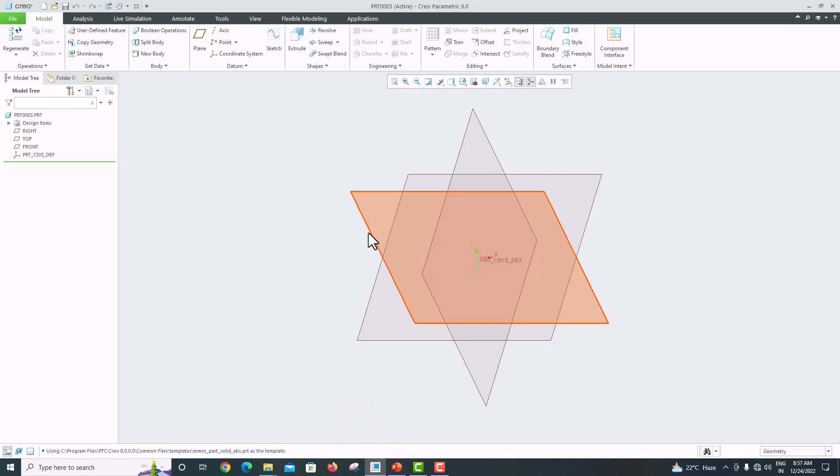Go to software, I am taking the front plane, sketch view. Draw the center line, press the roller to confirm.

Now start the sketch with a small line. Press the roller to confirm. Again press the roller to confirm.

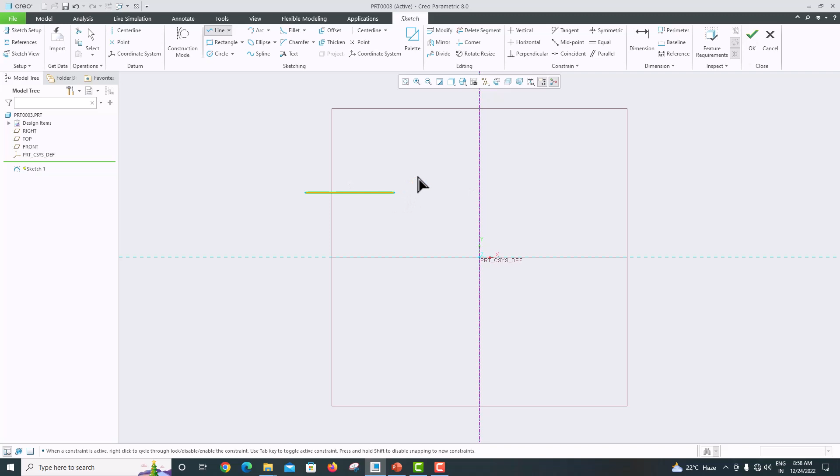Now just specify the length as 45, and this height I am specifying as 12. Press enter, then click fit screen.

And one more dimension we want to specify is this one. This distance is 166 divided by 2.

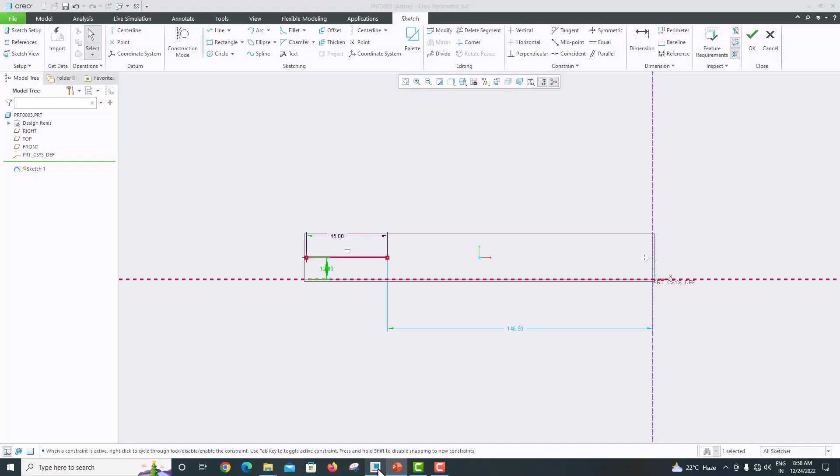Enter. Now take the line and draw the freehand sketch. Just roll the roller to zoom into your object.

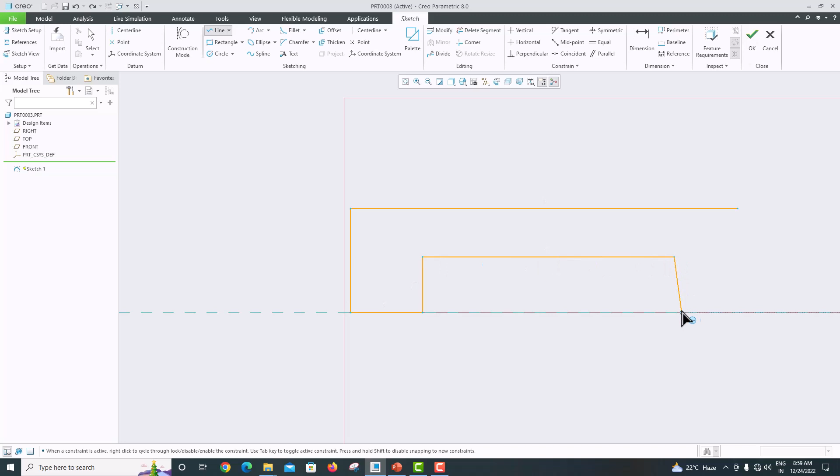Ctrl Z. Take the line: vertical, horizontal, vertical, again horizontal. Now join this point. Click the roller to confirm, and again click the roller to confirm.

Now we just want to specify the distance. These two edges should be equal length. Make this equal by clicking this edge, then clicking this edge again. Now go to the model.

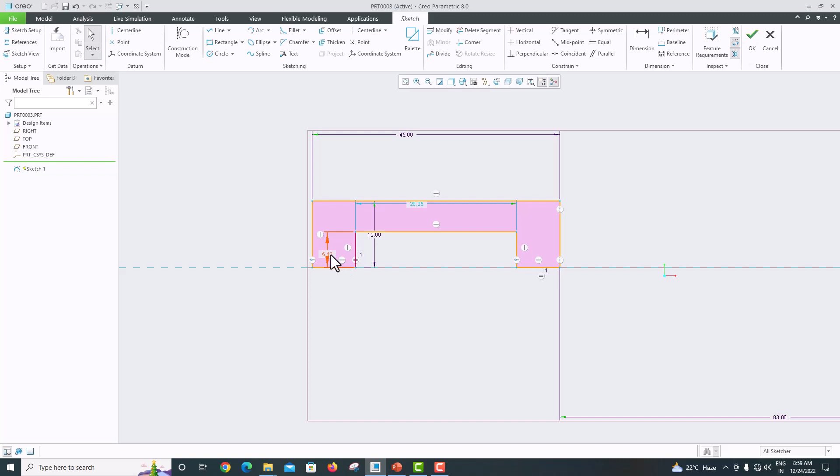This distance is 10, the in-between distance is 25, and this height is 2. This height, press the roller, again press the roller. This height is 2, the in-between distance is 25.

Go to the dimension, click this one, press here. This is 10. Just undo it.

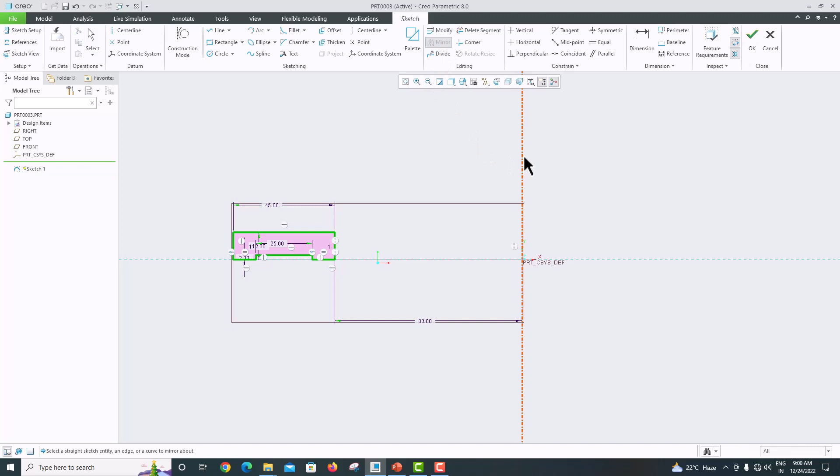Now we want to mirror. Go to our model - you want the same object to be mirrored here. For that, select the sketch, go to mirror, select the center axis. Now we have mirrored it. Click OK.

Now go to extrude, and make this symmetric. Go to our model - this extrusion length is 71. Enter 71, enter it again, and click OK to confirm.

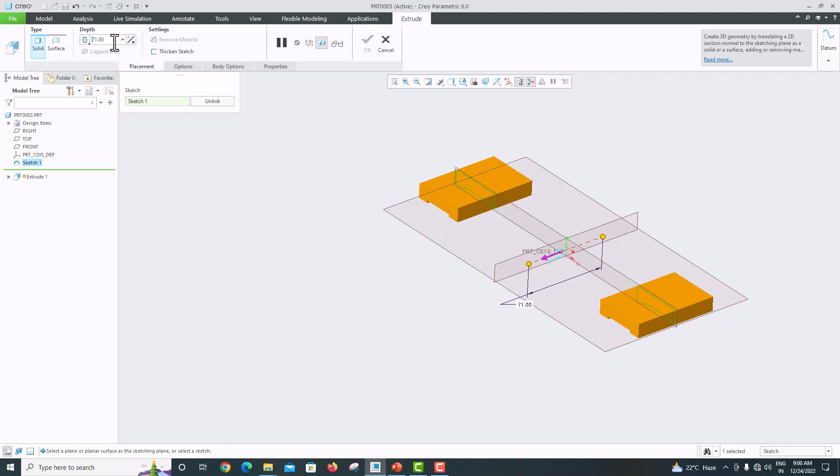Now go to the model. Now this bottom feature has been created. Then we want to make the top features. The distance height is 43 and the thickness is 10. For that, go to the model.

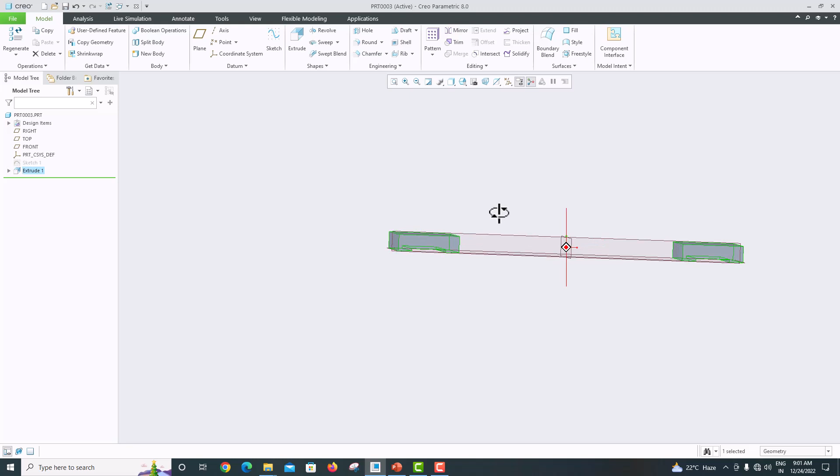Take this mid plane, go to sketch view. For reference, take these two edges and also this edge. Click close. Go to line.

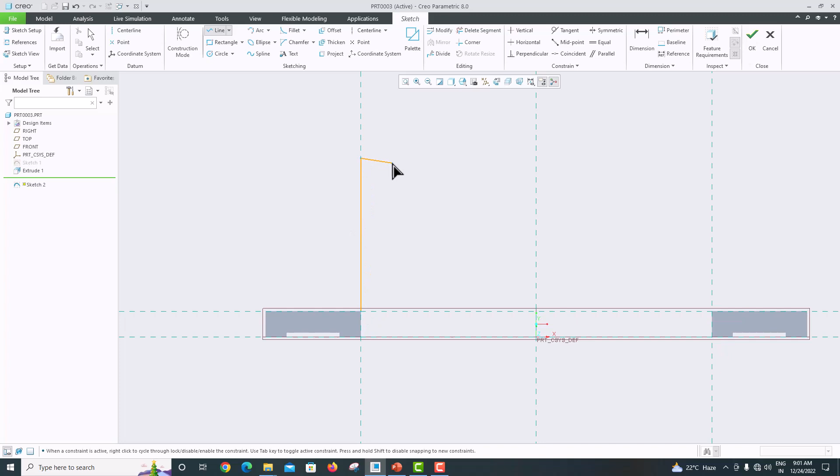Choose this inner edge, and press the roller to confirm. Again press the roller to confirm.

Now this height is 43. Specify this as 43.

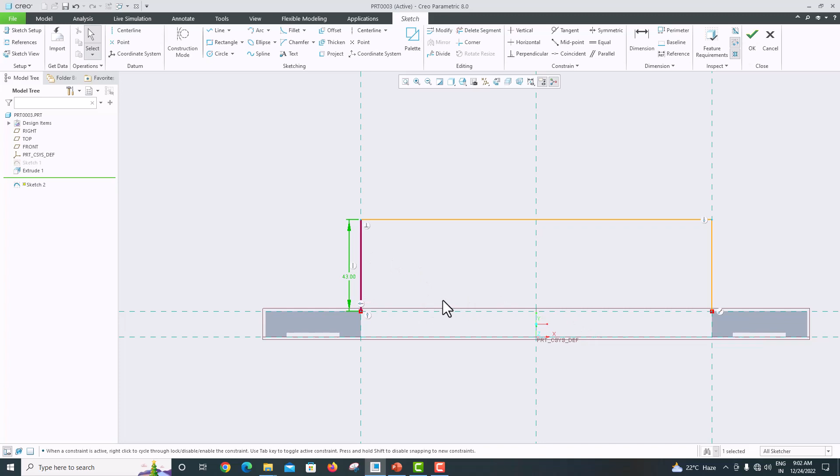Now we want to create one more line parallel to this. Delete this one, take this line, and make it parallel.

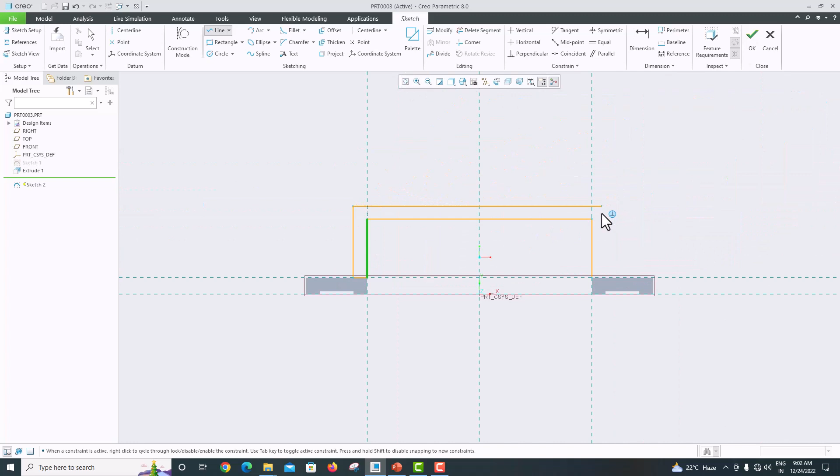Split screen, make it parallel, and close the line, then press the roller to confirm. Again press the roller to confirm.

Now we have specified the height as 43 and we want to specify the thickness. Go to dimension, click this one, press here - thickness is 10. Go here, thickness is 10.

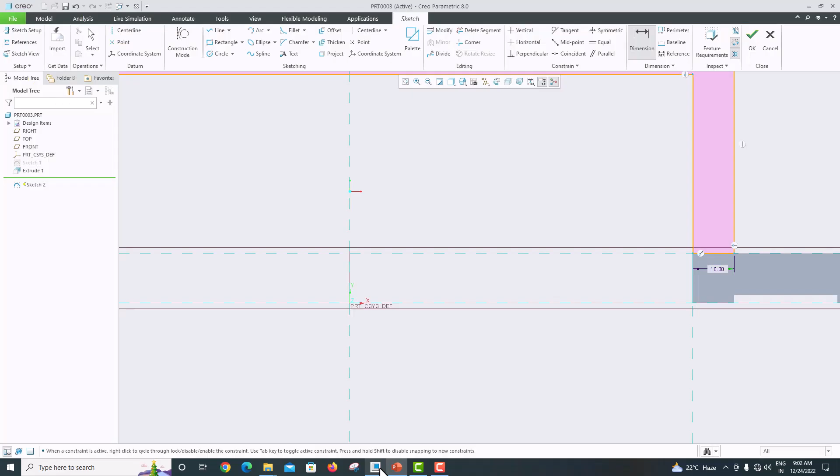Now make this equal here also. Click this edge and click this edge. Now this distance is also 10. For that, go to dimension - this distance is also 10. Now we have given every dimension.

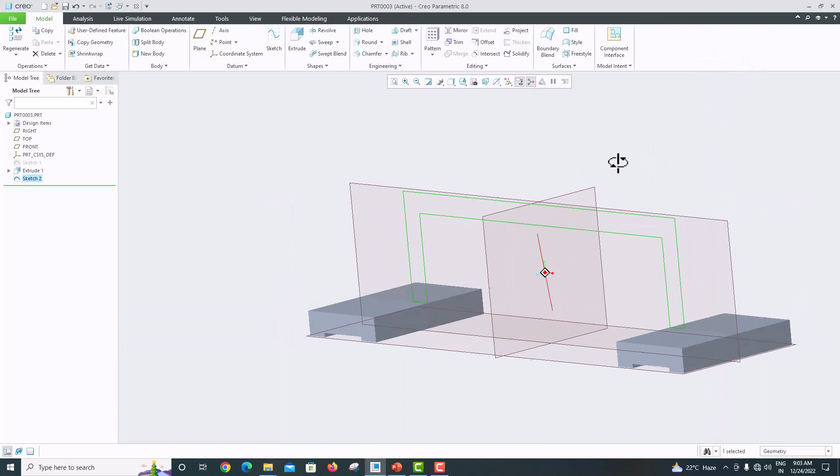Click OK, go to extrude, make this symmetric. Now the extrusion length is 61. Press enter, click OK to confirm.

Now go to the model. We have created this also. Now we just want to make this one the cylindrical portion. For that, we have this flat surface as a reference surface.

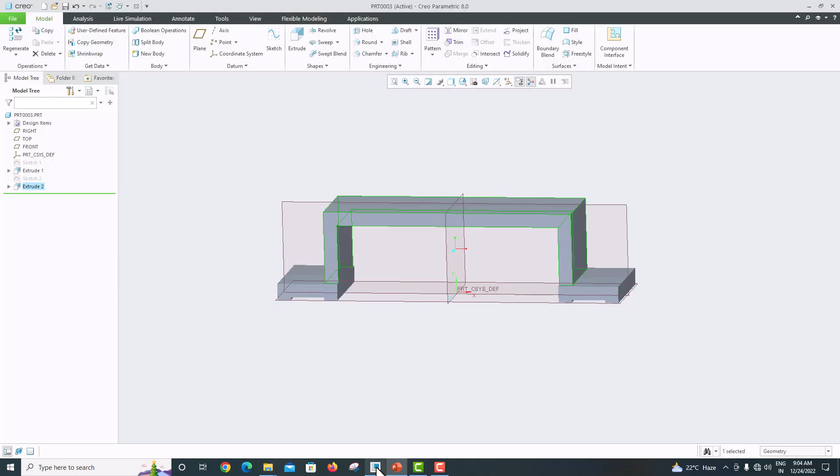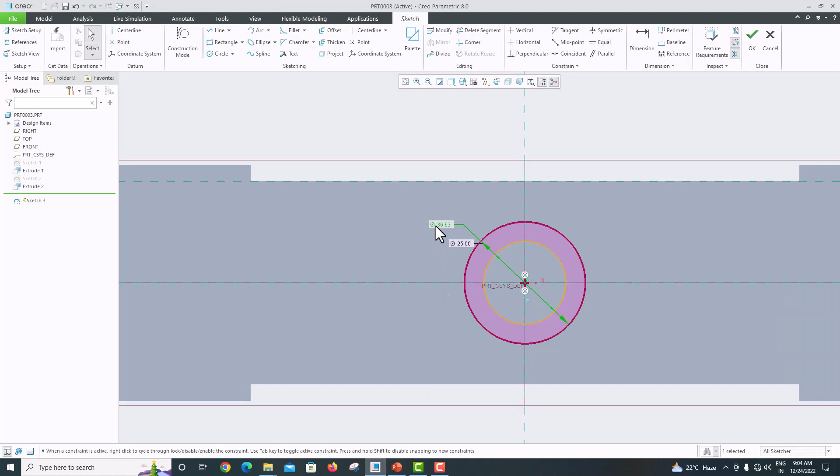Height of the cylinder is 25, with 25 mm diameter and 50 mm diameter. Select the surface, go to sketch view, go to reference, close, take the circle with center point, make one circle, make another circle, press the roller to confirm. Now this diameter is 25, again go to modify, another diameter is 50, this diameter is 50.

Now click OK, go to extrude. Now the extrusion length is 25. Press enter and click OK.

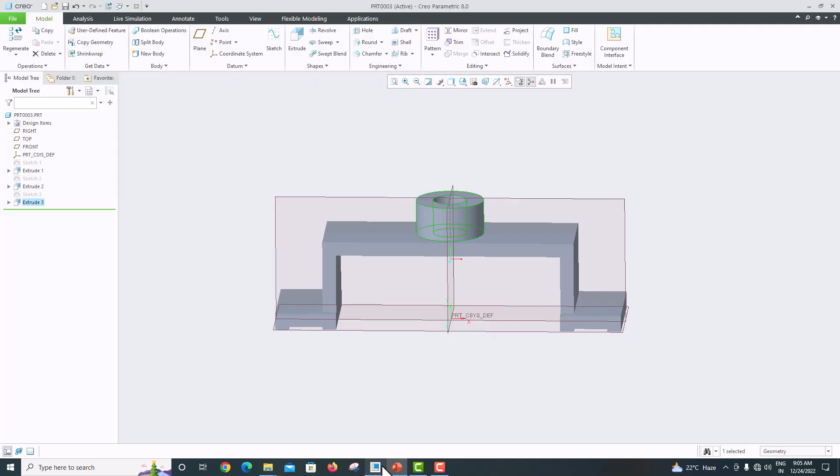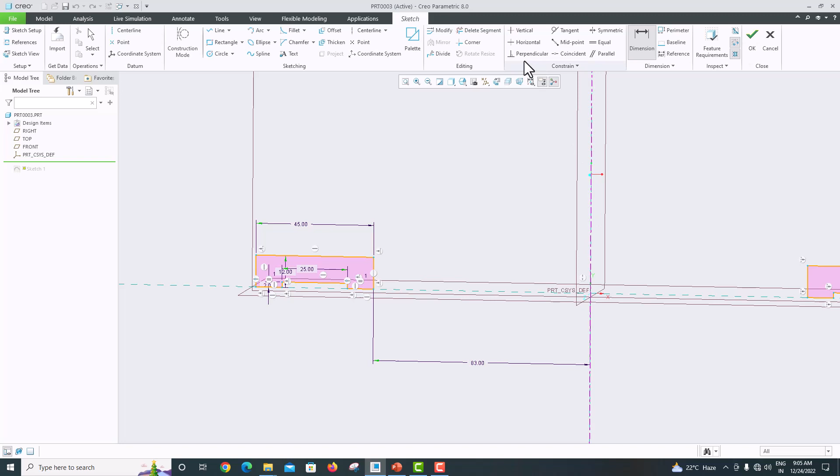Now go to model, now I just want to check the dimension, edit. Yes, this distance is actually not 83. From this point to this point, the distance is 83. For that, go to dimension, sketch view, from this point to this point.

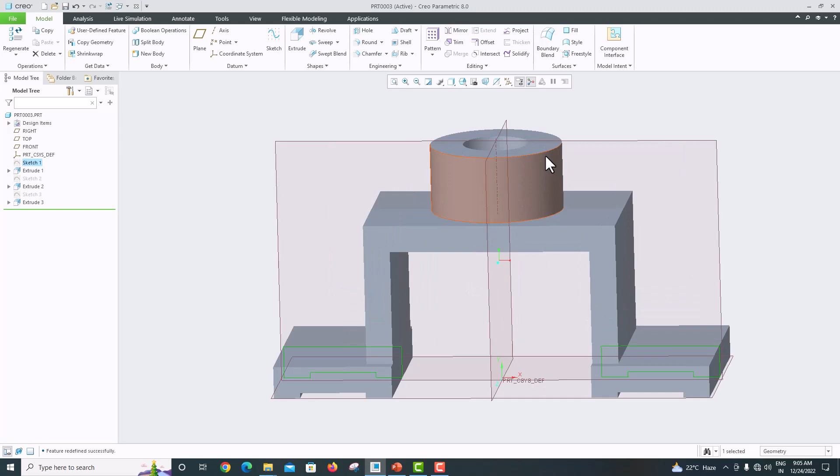Just delete this one. This distance is 83. Now just click OK to confirm. Now the whole object is modified as per the dimension. Now we have made this also.

Actually, this hole is throughout the hole. For that, go here, select the surface, go to sketch view, go to reference, take this inner circle as a reference, close it, create a circle, press the roller to confirm.

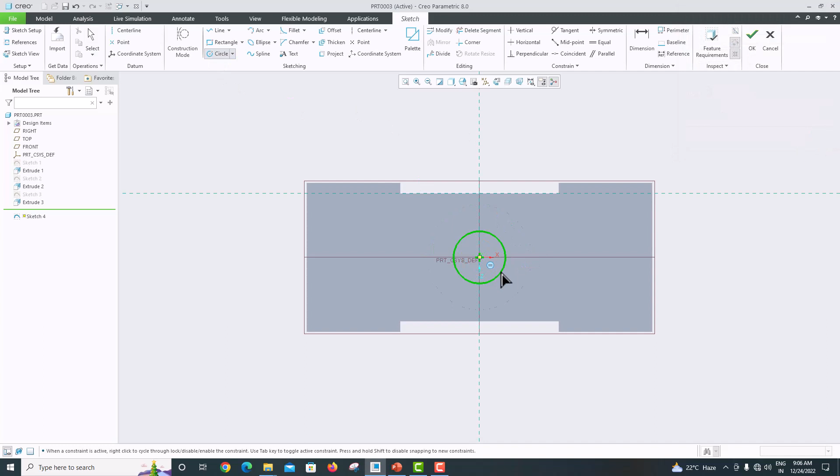Now sketch is done. Go to extrude, flip the direction, remove material, click OK. Now we have done this.

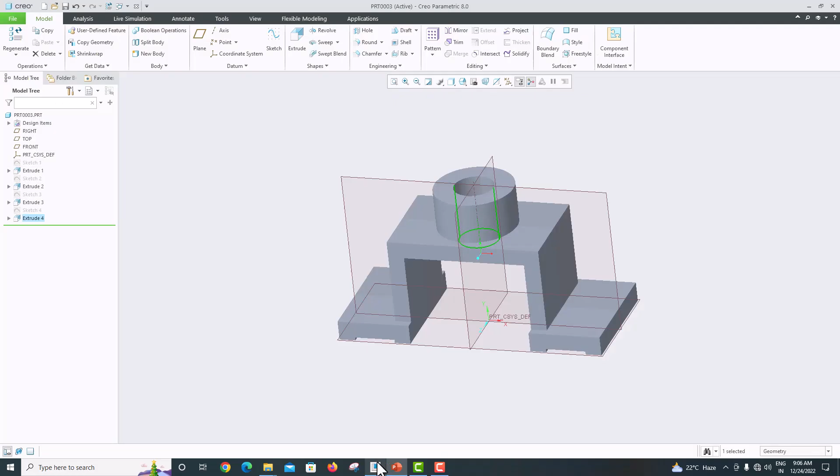Now we just want to make this round hole, round fillet of radius 10. Go here, select this edge, press the Ctrl and hold, select this edge, again press the Ctrl and hold, select this edge, and press the Ctrl and hold, select this edge.

Go to round, the radius of the round is 10. Press enter. Now just click OK to confirm.

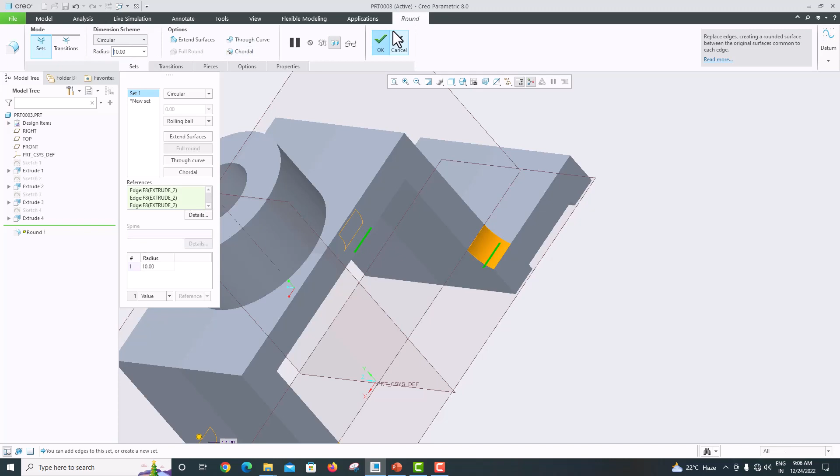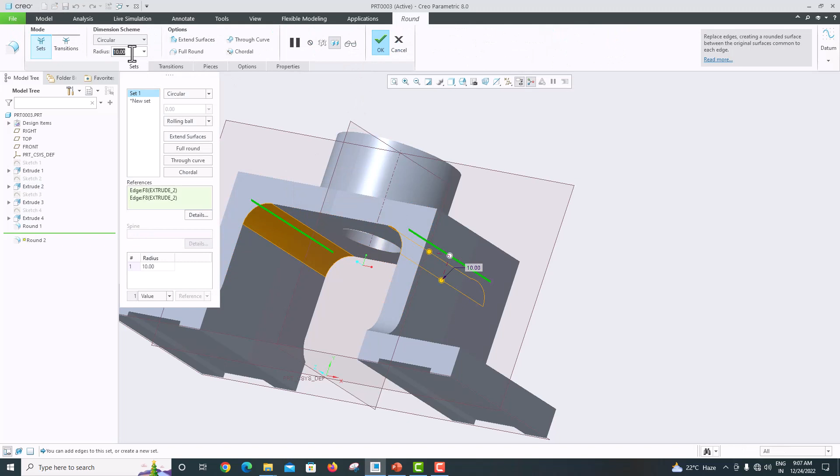Now we have made the round, and here there is a round that radius is 6. Just go to the model, click this edge and press the control and hold, click this edge, go to round of radius 6, enter and click OK to confirm.

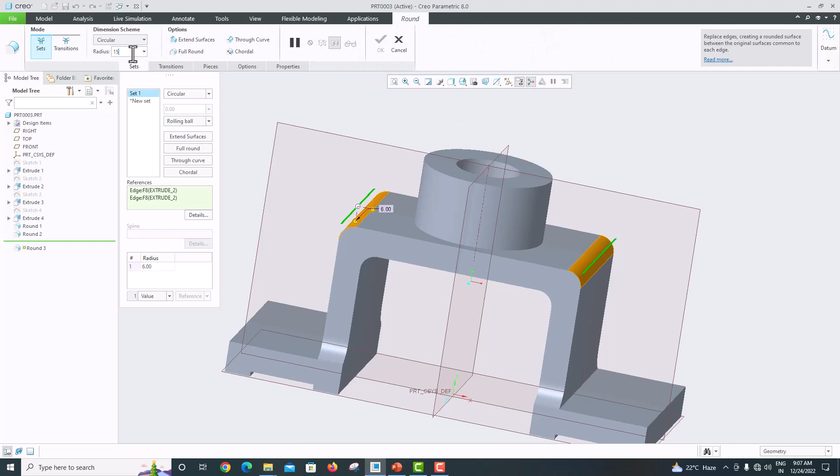Now one more round is here, that fillet of radius 15. Select this edge and press the control and hold, select this edge and click this round of radius 15, enter it and click OK. Now every fillet we have done.

This hole also throw out, go to the model. The final feature we just want to make is this 4 holes of diameter 12. The distance between the hole is 25, and from the side is 23, and this side is 20.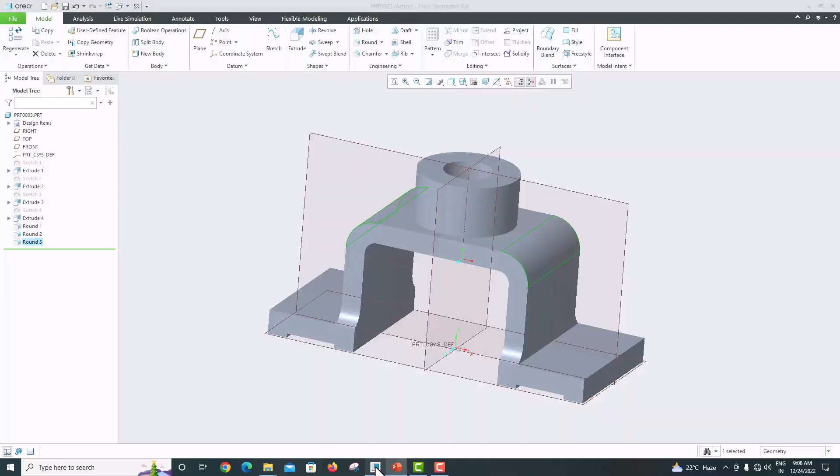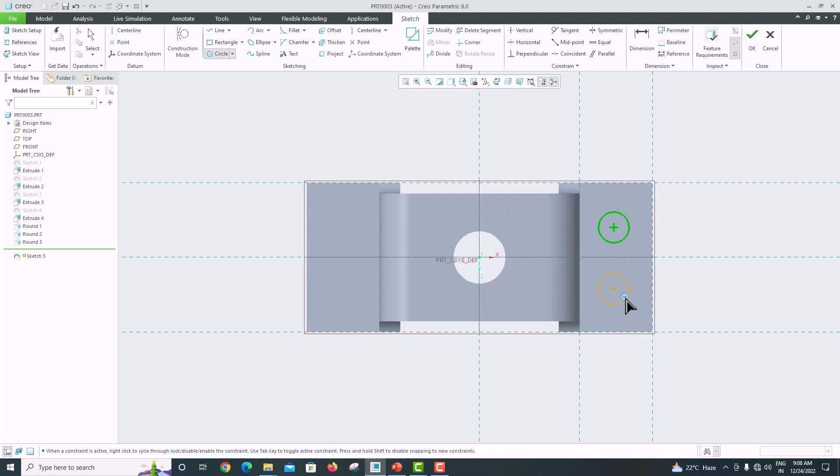Go here, select the surface, sketch view, go to reference, close, take this circle with center point, create one circle and create another circle with an equal diameter. Press the roller to confirm.

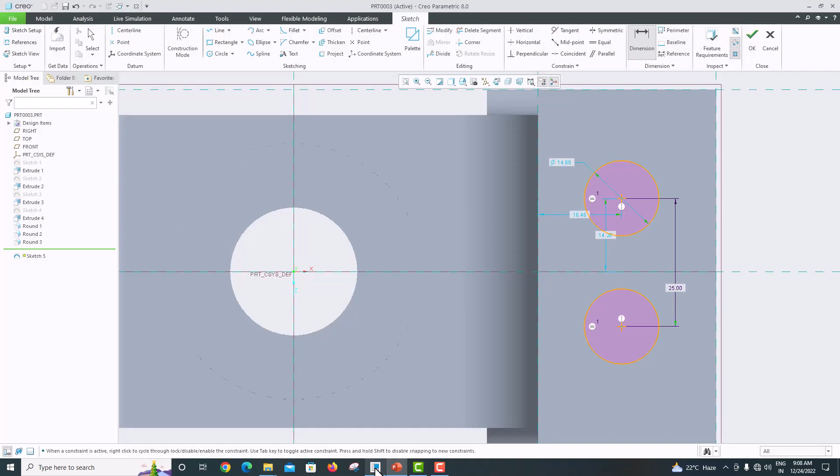Now the distance between this, go to dimension. The distance between these two holes is 25. The diameter of the hole is 12. Diameter is 12.

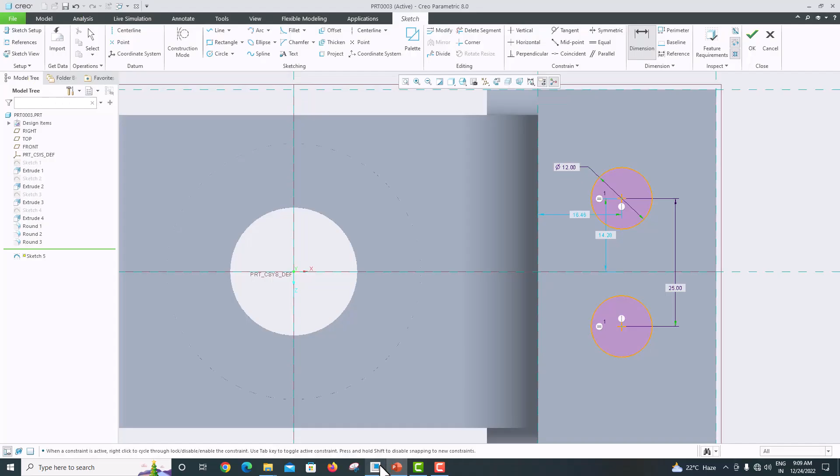Now one side from the one hole is 23, and vertical distance is 23, horizontal distance is 20. Go the dimension. This distance is 23, horizontal distance is 20.

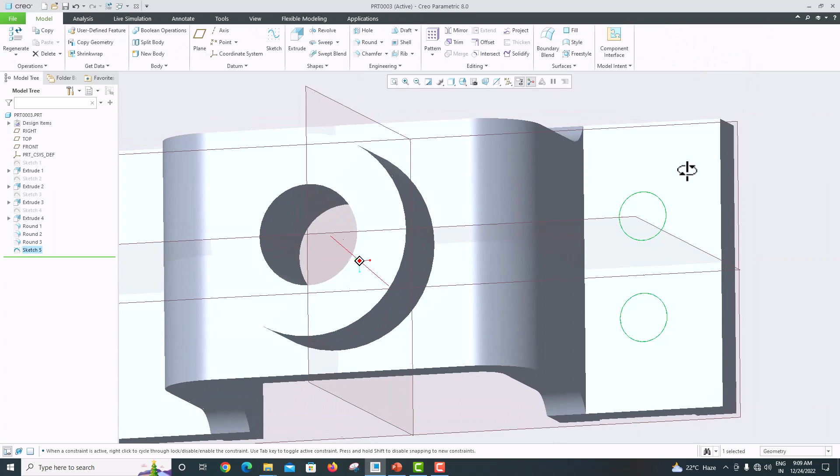Now every dimension we have specified. Just click OK. Now go to extrude, flip the direction, change into to next, click OK.

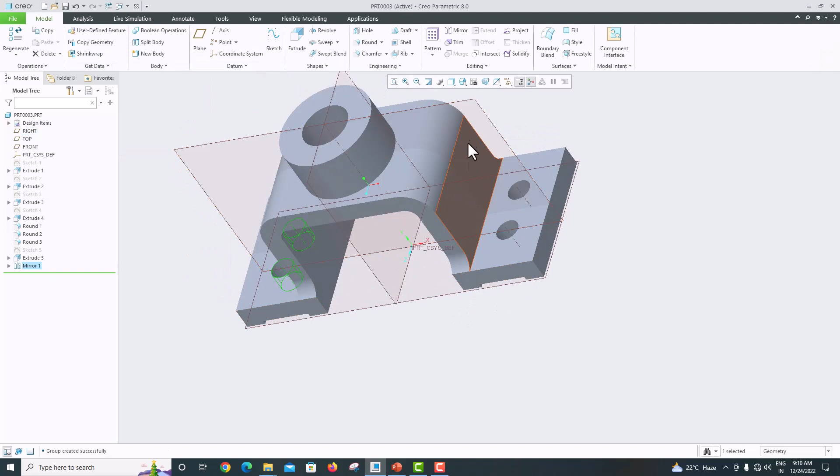Similar hole we just want to make here. For that, select this extrude, mirror, select this midplane, click OK. Now go to standard orientation, hide your all planes. Now we have completed our model.

Go to shading with wire edge. For appearance, go click this one, select the spot.